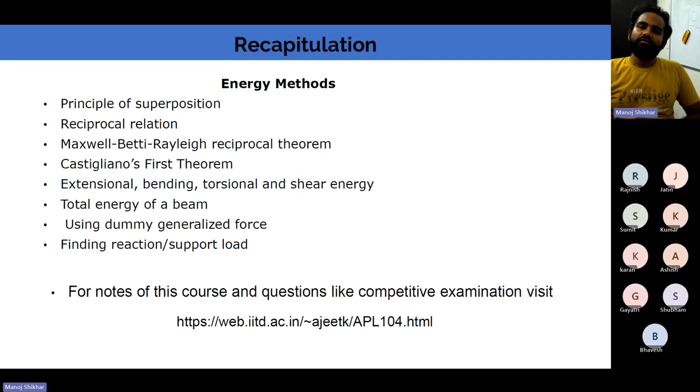Also, these notes have some questions at their end, and those questions are at the level of competitive examinations. So if you try to solve them, you may be able to get good marks in the Solid Mechanics portion of the competitive examination. Thank you.

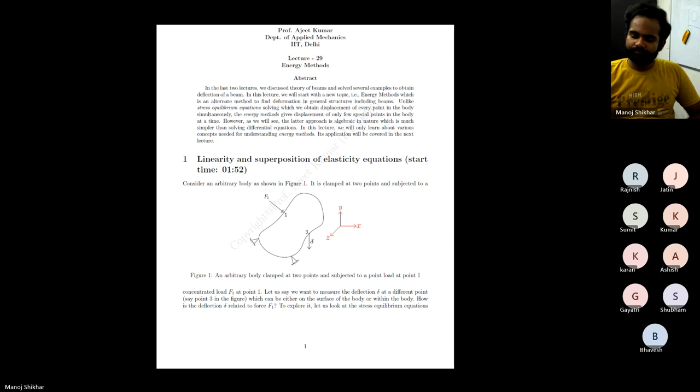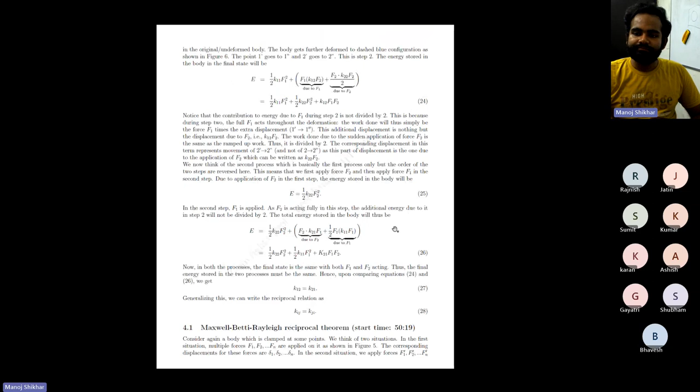But if you read advanced solid mechanics, continuum mechanics, or advanced finite element methods, there we do not use the superposition method. So in superposition method, what we do is find displacement due to each of the forces and add them. Sir has discussed this in a very extensive manner in his video lecture, so I will skip this part. There are a few things which you should remember.

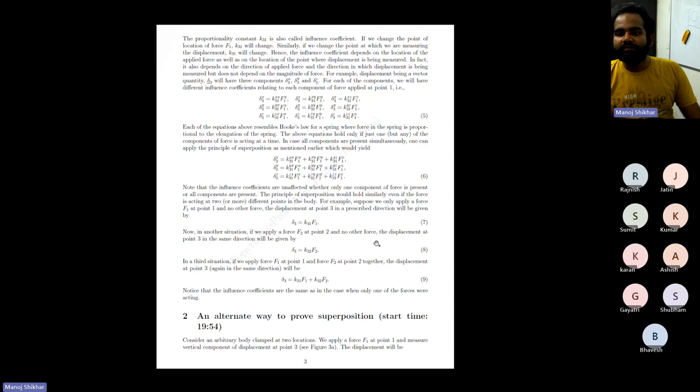There was one interesting thing sir had discussed here, maybe I can reiterate that. In this case, first we applied a force F1, so we wrote the displacement delta 3 that happens solely because of F1, which was K31 times F1. Then we applied F2, so delta 3 now will have the displacement due to F1 plus the displacement happening because of F2. Then we applied minus F1, so the net force on the body became F2. So we know that the deflection due to F2 will be delta 3 equal to K32 times F2.

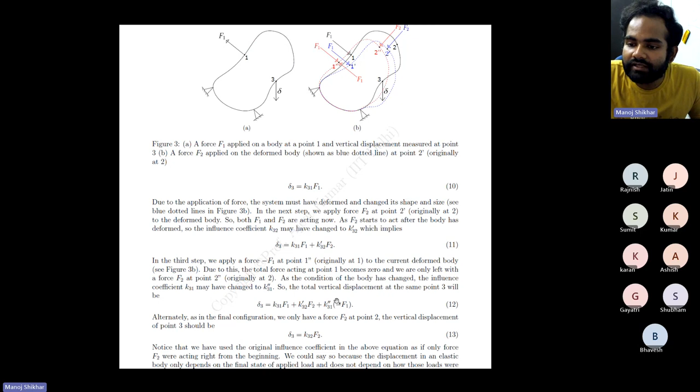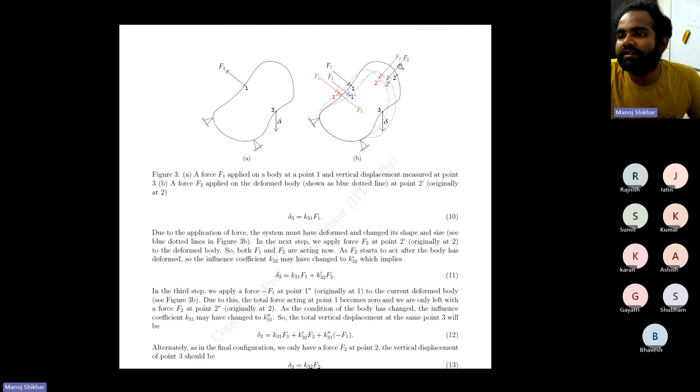From equations 11 and 12, the difference will be that in delta 3, there will be one more extra term, K31 double prime minus F1. So equation 12 and 13 should be equal because we are applying only F2 on the body. Equating this gives equation 14. Since this is true for any F1 and F2, the coefficients of F1 and F2 should be 0. From there we get K32 prime equal to K32, and K31 equal to K31 double prime. So this is the superposition method, the alternate way to prove it.

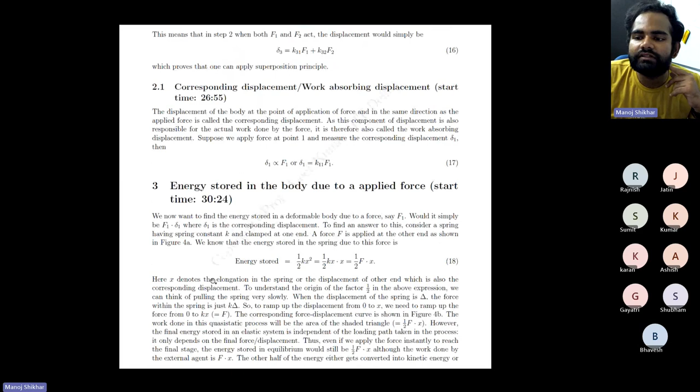Another interesting thing was that we wrote energy stored equal to half kx square. So if we apply a force slowly, like from 0 to F, then the total work done will be half into F into X, which is the area of this triangle.

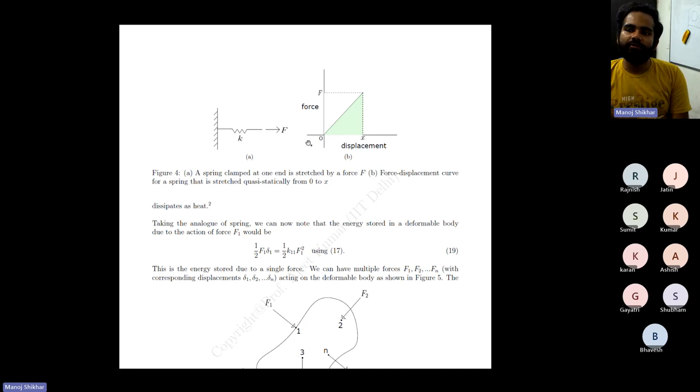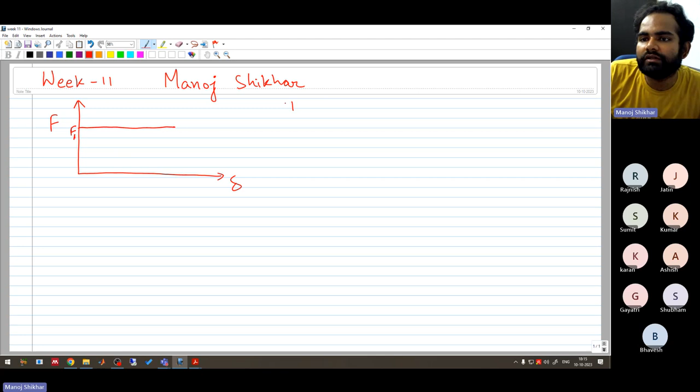But if you suddenly apply the force, the force versus displacement graph will look something like this. We are applying a force F1 from the start. So in this case, total work done by force F will equal the area under this curve. Suppose this point is X and this is 0. Then work done equals F dot X, so we can say Fx. The energy stored in the body will still be half Fx, not half Fx square — sorry, half into Fx.

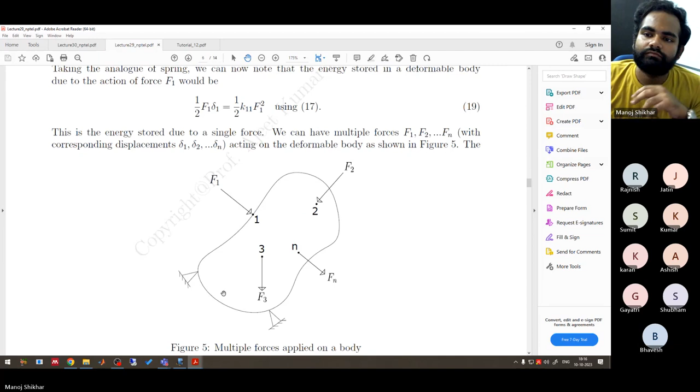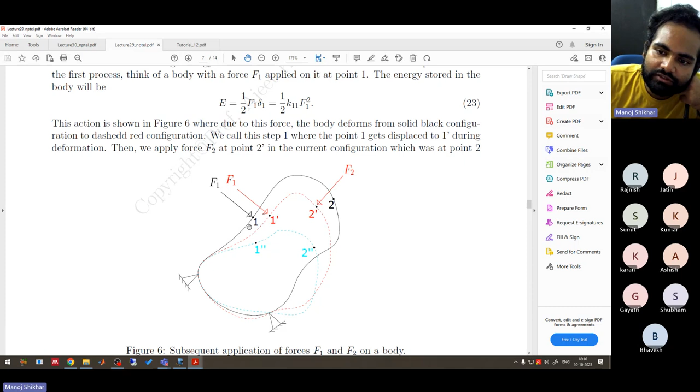One more interesting thing — and I want to discuss this because I've seen many students making this mistake. Initially we are applying only force F1 on this body, so the body gets deformed. The energy stored in the body will be half into F1 delta 1. As discussed, the energy stored will be half into F into displacement, so we can write half K11 F1 square, replacing delta 1 by K11 into F1.

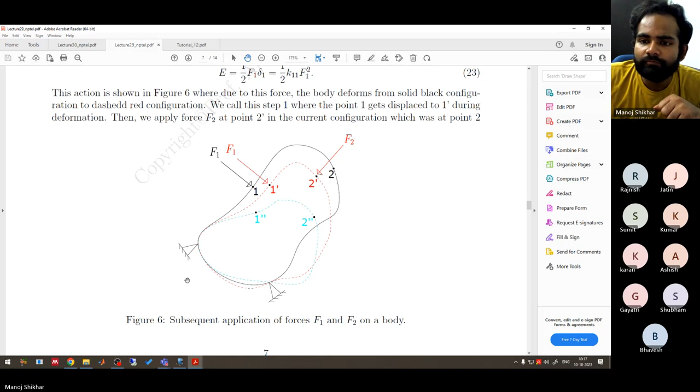Now we are applying F2, and because of F2, there will be some displacement at 1. So while writing the energy after applying F2, the energy stored in the body because of deformation at 1 will be F1 into delta 1. This delta 1 is like the new deformation, from 1 prime to 1 double prime. Since F1 is already acting from the start of this new application, the total work done by the force will be F into X, and that is what gets stored in the body. That's why it's F1 into K12 F2, and the energy stored due to F2 alone will be half K22 F2 square. So keep this in mind.

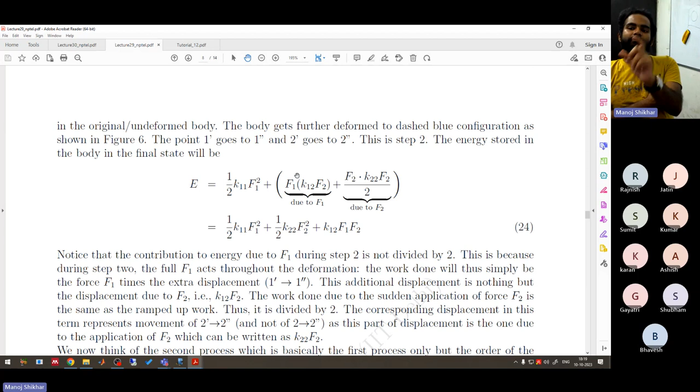What people often do is write energy equal to half F1 delta 1, then after applying F2 they write half into F2 into delta 2, forgetting this extra term. You should not forget this term, and also remember that the half factor will not be there for this case, because F1 is already acting upon the body when you apply F2. So F1 is acting throughout the new displacement happening from 1 prime to 1 double prime.

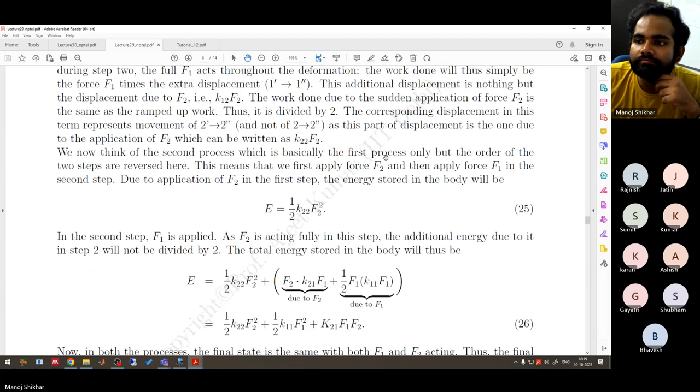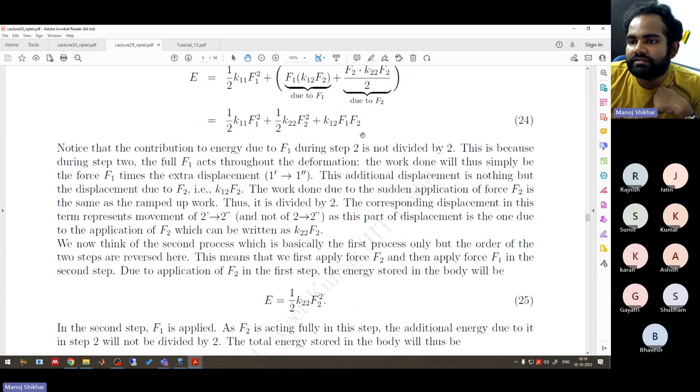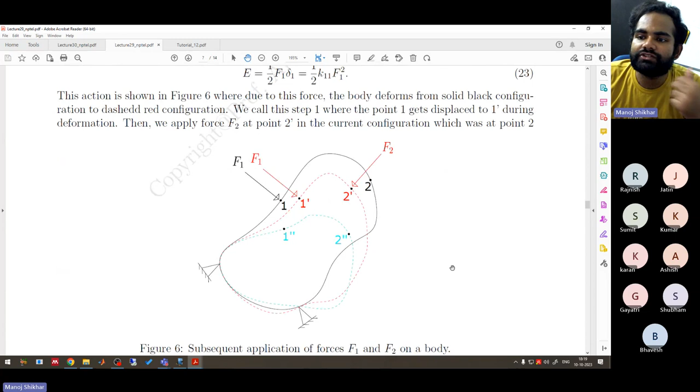Then we did the analysis by first applying F2 and then applying F1. From there we have equation number 24 and equation number 26. Comparing them, we find that the last terms, K12 F1 F2 and K21 F1 F2, are different. But since we are using a linear elastic body, the final energy stored should be equal. Hence K12 must equal K21, and thus Kij equals Kji. This is called the reciprocal relation.

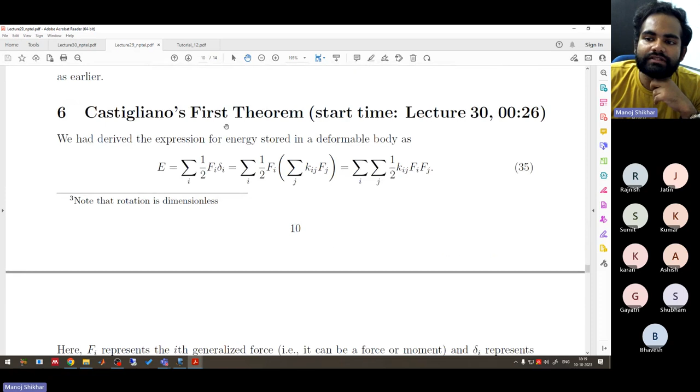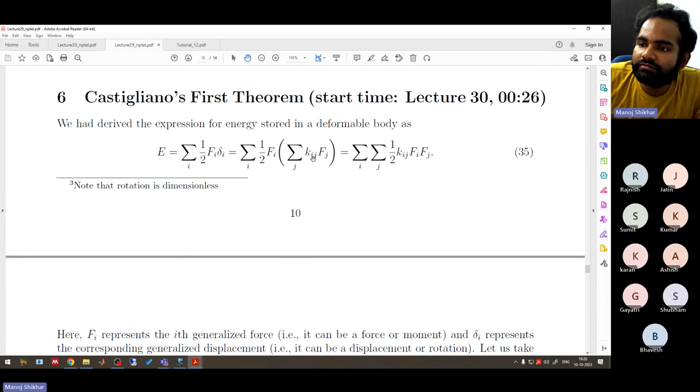Now, Castigliano's first theorem states that if we know the energy stored in the body, we can find the generalized displacement at the ith node by differentiating it with respect to F at that node. So E equals half fi delta i. We can replace delta i by this term and get an expression like this.

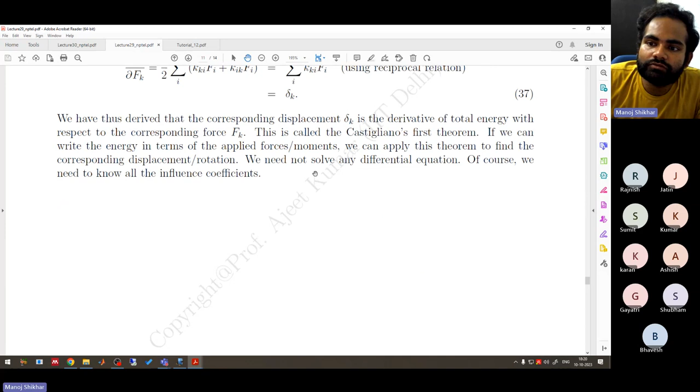So this is what Castigliano's first theorem is, that the corresponding displacement delta K is the derivative of total energy with respect to the corresponding force Fk.

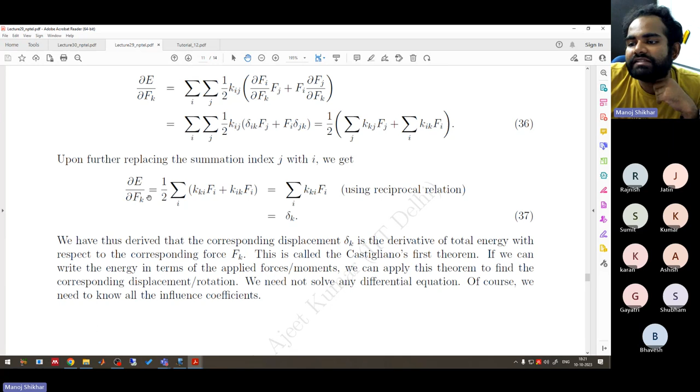Suppose if I tell you to find the corresponding rotation theta K with respect to the corresponding moment Mk. So what we will do is differentiate this E with respect to Mk. Mk is the moment, so that is what we will have to do.

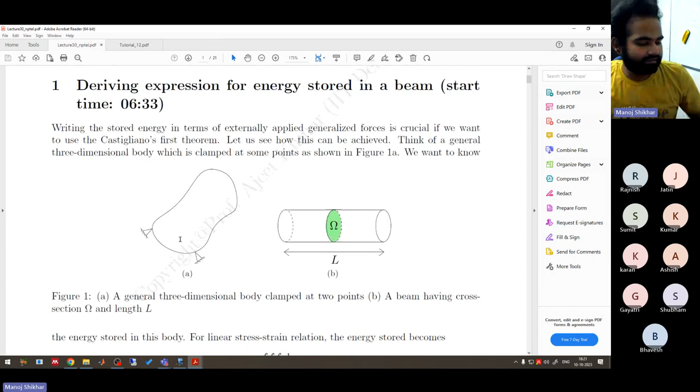Then in the next lecture, so in the last lecture, we were introduced to the idea that we can find the displacement or the generalized displacement delta K by differentiating our energy with respect to Fk.

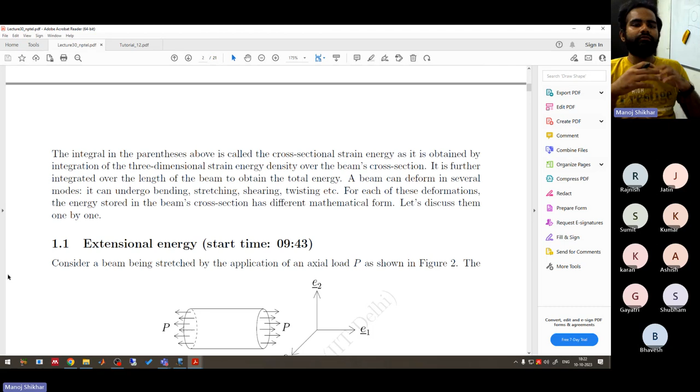So how to write total energy, that is being discussed in lecture 30. How do we write the total energy E? While writing the total energy, we have to take into account all kinds of forces and moments acting on the body, or in other words, all kinds of energies like extensional energy, bending energy, torsional energy, and shear energy due to transverse load.

We know it doesn't matter if it is a linear or non-linear case, energy is always additive, so we can always add the energies, right? So this total energy finding method is not necessarily only true for linear elastic bodies, but the superposition theorem is only applicable for linear elasticity basically.

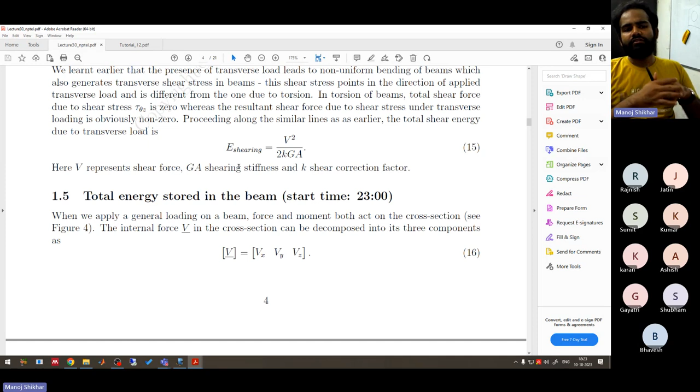Writing the energy depends on the material model, you may have different G or different J, different material properties like G, E. Depending upon that, these may vary. J will depend upon the geometry of the body. So depending upon these factors, the energy expressions will be different.

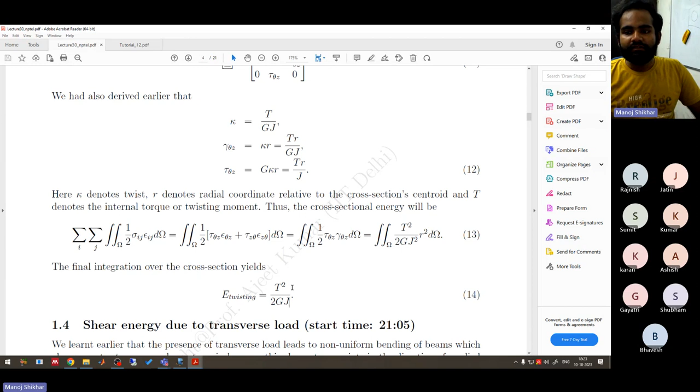It may be different, but in the end we can find the total energy by adding all the energies. We can calculate bending energy, extensional energy, shear energy, torsional energy, and add all of them to get the total energy of the body.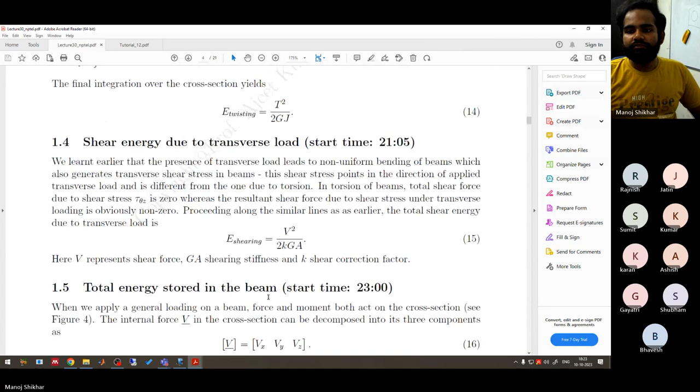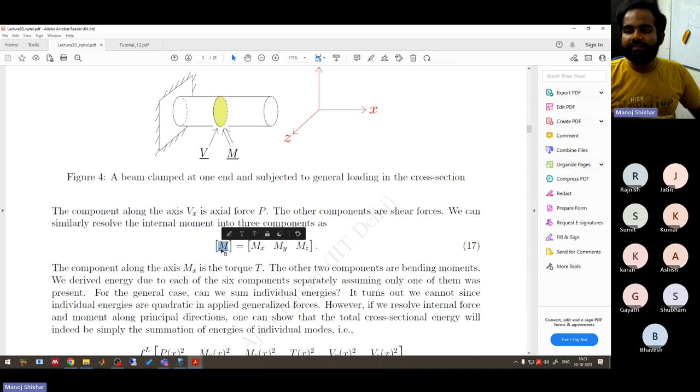So in this case, mainly the energy due to the shear force V and moment M is written because we are writing the energy for a beam. Okay, so now we can move on to some of the problem statements.

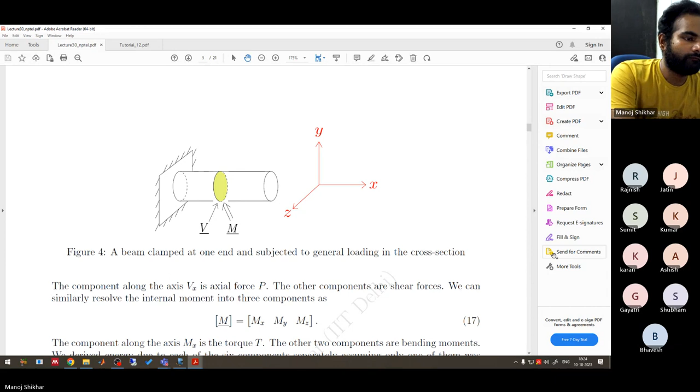So the question is, think of a rectangular beam as shown. Assume its cross-section to be solid circular. Suppose that ring is subjected to equal and opposite forces at A and B. And neglect the energy in the beam's cross-section due to shear force and axial force.

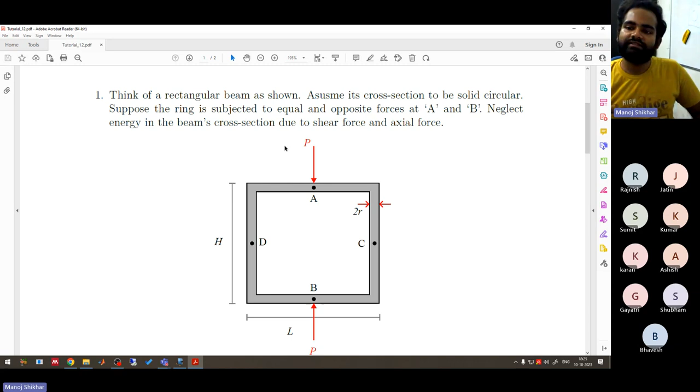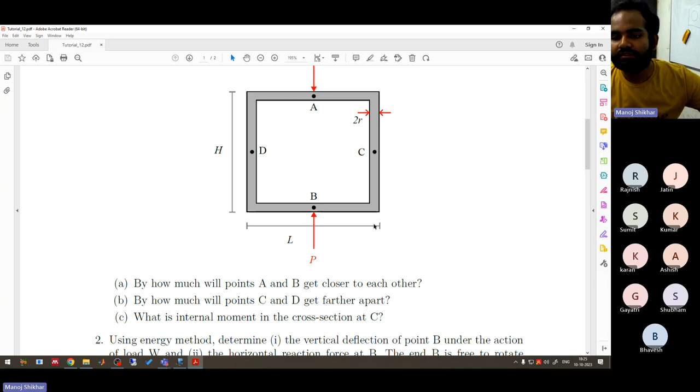The questions asked are: by how much will point A and B get closer? They are applying forces P at A and B, and asking how much A and B will get closer. Second, by how much will points C and D get apart? And third, what is the internal moment in the cross section at C? So we have to find what M will be here.

I think it's clear. So from tutorial 12, we will be doing question number 1 right now.

So here they have given us a rectangular ring. They've applied loads at two points, this point is A, this point is B. There are 2 points C and D here. This is the length L by 2 and L by 2.

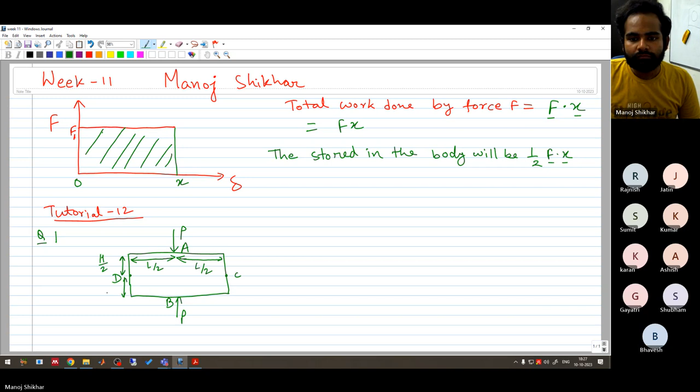And they are asking, the first question is delta AB, so what is the distance between... B/W means between, okay, I'm using a short form so I'm just declaring it. The second question is we have to find delta CD.

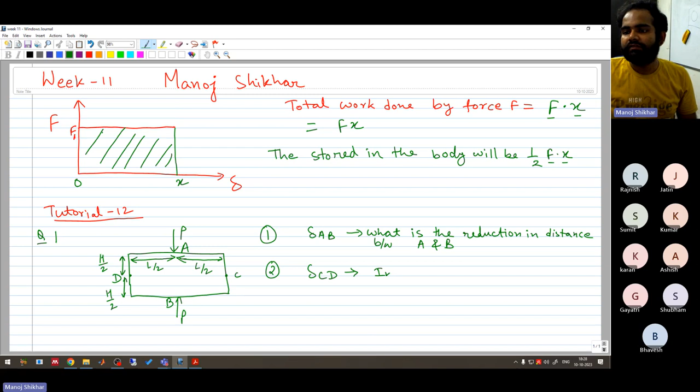Like reduction in distance, increase in distance between C and D. And the third question is moment at cross section at C. So this is what we have.

So looking at this question, first thing we should observe is that this is a symmetric problem, so we can actually look at the top part first. This is our A. So we are taking a section at C and D, which are the midpoints of these limbs. So here the forces and moments will be...

Before doing that, we can also observe what the deformation will be in this case. So our body will deform, and our body will have some final shape like this.

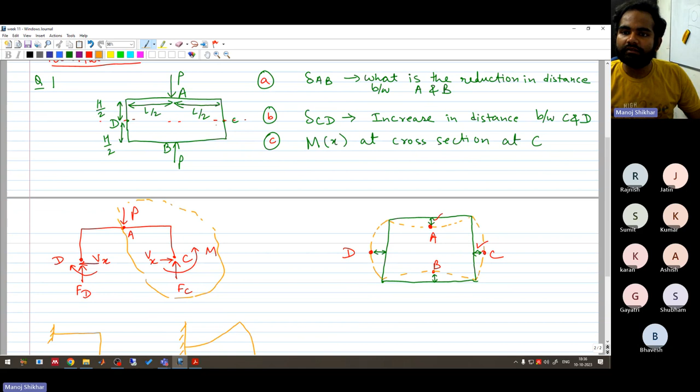Now let us consider what will happen if we had cut at point C, because that will give us the value of VC.

So if you look at it, this is the upper half and this is the lower half. This is point A, this is point B. B will also be treated like A only, because B and A are essentially going through this similar kind of deformation. B is also not rotating, it can only move downwards.

So if we fix B, our final system will be something like this. So from here, if we take a cut section at this point C, our Vx will be in this direction. Suppose we are assuming Vx to be in this direction, or let me write it as VC in this direction for A, then for B it will be in the other direction because of Newton's third law.

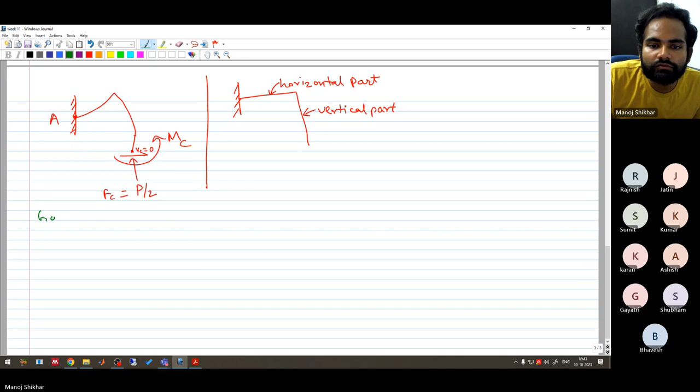Now our goal will be what? New goal is to find moment Mx in the horizontal and vertical part. So let's first do the analysis for the vertical part.

Suppose we have made a cut somewhere at this x. So this is our case, right? This is h by 2 and this is L by 2. So remember that. For the vertical part, this is our x - suppose we have made a cut at this x.

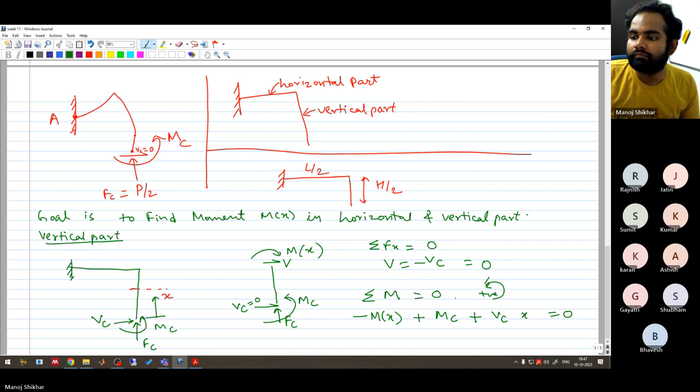Summation of M equal to 0, and I'm assuming counterclockwise as positive. So minus Mx plus Mc plus Vc into x equal to 0. So Mx is Mc plus Vcx. So this is the vertical part.

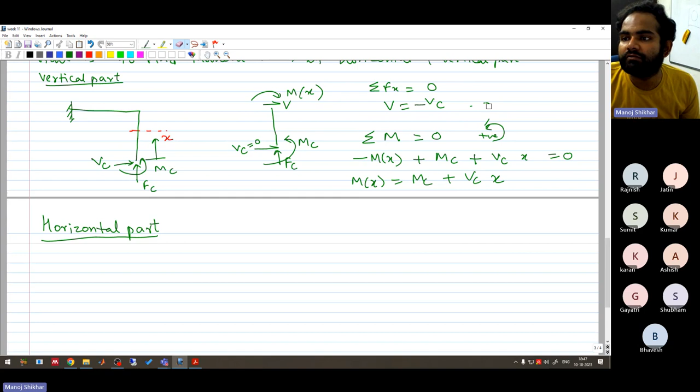For horizontal part, let's keep it as V equal to minus Vc right now. For the horizontal part, what will happen? We have something like this. Our X will be somewhere here, and we are making a cut here. So our final FBD will be - since this has the negative normal direction, our moment will be in clockwise direction, and our shear force will be in the negative direction.

Here actually I have made one mistake. The direction of shear should be in the opposite direction because this is the negative normal face. Here V equal to Vc. And there is some other force here. Here we have Fc, we have our moment Mc, and Vc equal to 0.

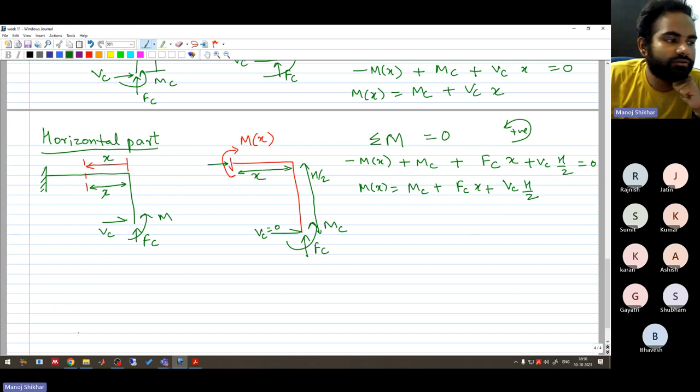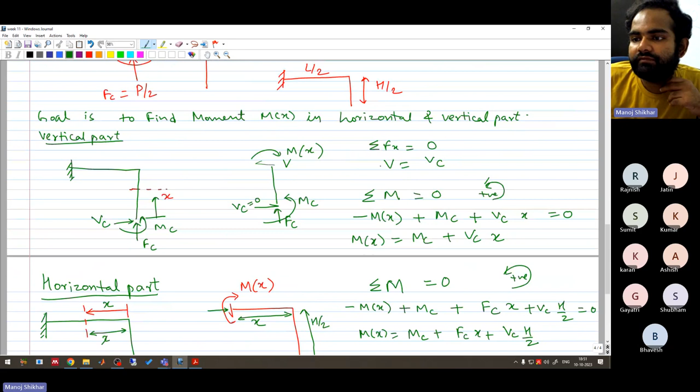So we have found the moment in the vertical part and top part. Now we need to write the total energy due to bending. Also, one thing mentioned in the question is that we have to neglect the energy due to shear force and axial force. That's why we will not consider the energy due to this V or any axial force - we will just write the energy here with respect to bending only. So this is given in the question, that's why we are doing it. So the total energy will be only due to the bending moment.

But this bending moment itself is a function of Mc, Fc, and Vc, right? So we are showing here in the arguments Fc, Vc, and Mc. Now the interesting part comes because we have two different kinds of moments in the horizontal and vertical limbs, so we will have two integrals here. First we will write for the vertical part - so here the moment due to the vertical part will come. What was it? It was Mc plus Vc into x, right? So the energy due to bending is M square by 2EI - that is what I'm replacing here.

For the horizontal part, we are moving from 0 to L by 2. The bending moment of the horizontal part is calculated as MC plus FCX plus VCH by 2, whole square, by 2EI, dx. Now this is the total energy.

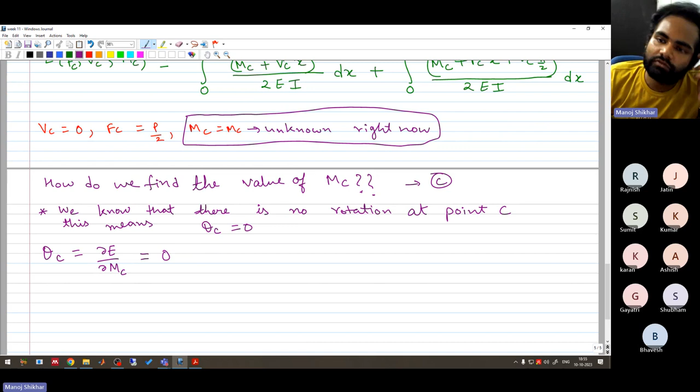So we have the energy expression here. We know that if we differentiate it with respect to MC, we will get theta C, and we know that it will be 0. So we have to differentiate this energy equation and equate it to 0, where FC is P by 2 and VC is 0. So let's do that.

So del E by del MC will be what? The integral 0 to h by 2. The upper part will be differentiated with respect to MC, so it will come to be 2 times MC plus VCX into 1. So this will be by EI, 2EI.

Plus 0 to L by 2, 2 times MC plus FCX plus VCH by 2, by 2EI, and this should be equal to 0. So we know that VC equal to 0, and FC equal to P by 2. So we'll put it here and we will get.

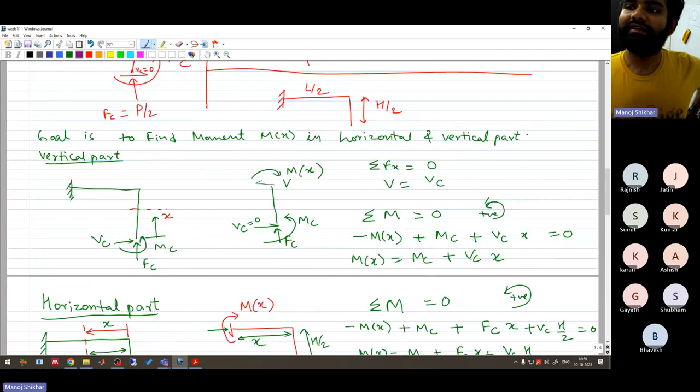Now we have to find the reduction in the distance between A and B. We have to find what is the reduction in distance between A and B, and to do that, how do we do that? To find the reduction in distance between A and B.

We will have to do del E upon del FC, at VC equal to 0, FC equal to P by 2, and MC equal to what we have found here, minus PL square upon 8 into H plus L. So this is what we will have to do.

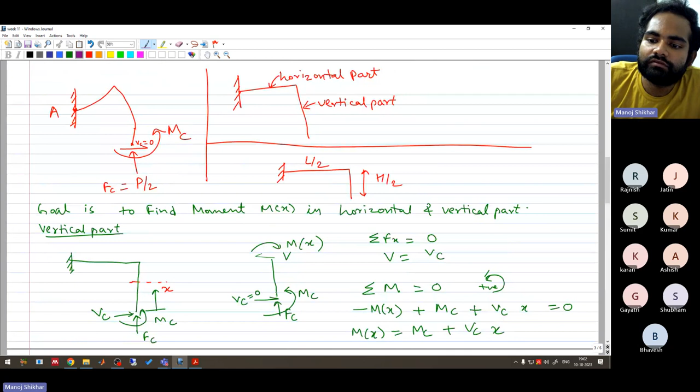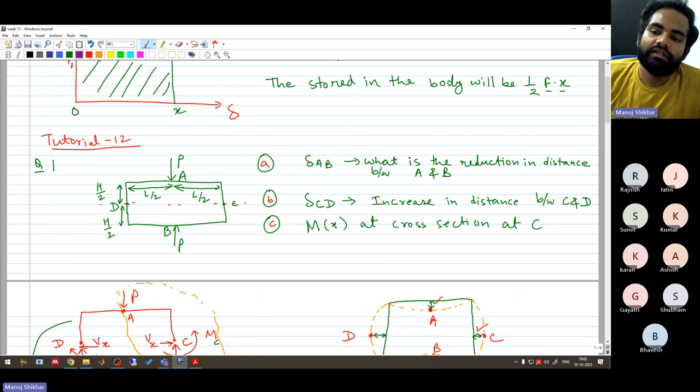And why are we able to write it as del E by FC? The amount point C will move in the vertical direction, that is the deflection of this point A. That's why we are able to do that.

So anyways, moving forward, this will cancel. We can take 1 by EI outside, and we can also do VC equal to 0. So we have essentially 0 to L by 2, MCX plus FCX square dx. So delta AB by 2 is 1 upon EI into MCX square upon 2 plus FCX cube upon 3, 0 to L by 2.

So this is 1 by 4 EI, L square, 1 by 4 EI, MC plus FL by... this is what you will get finally. So delta AB will be 2 times L square upon 4 EI into MC upon 2 plus FL upon 6. So this is L square upon 4 EI into MC plus FL by 3.

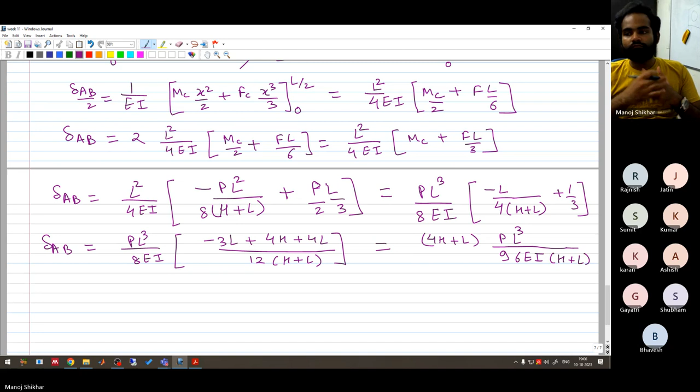So this is the final solution. So this is delta AB.

Now to find the increase in distance between C and D, we have to do delta CD by 2 equal to del E upon del VC at C. So here VC equal to 0, FC equal to P by 2, and MC equal to minus PL square upon 8H plus L.

So again, we will, let me copy this. Save this also. So this is the total energy, right? So we will have to differentiate this total energy with respect to VC.

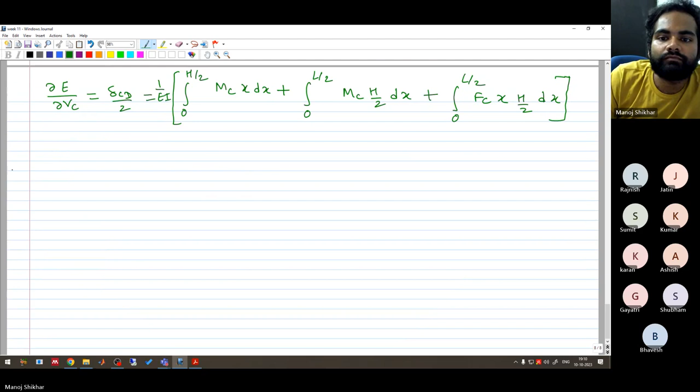So delta CD upon 2 is MC x square upon 2, 0 to h by 2, plus MC h by 2 into x from 0 to L by 2, plus FC h by 2 into x square upon 2 from 0 to L by 2. So this 2 will cancel. So we have delta CD equal to MC h square upon 4 plus MC HL upon 2 plus FC HL square upon 8.

Okay, so here substitute the values of MC, PL square upon 8H plus L. I have missed 1 by EI. So remember to include 1 by EI, which we had taken common, minus PL upon...

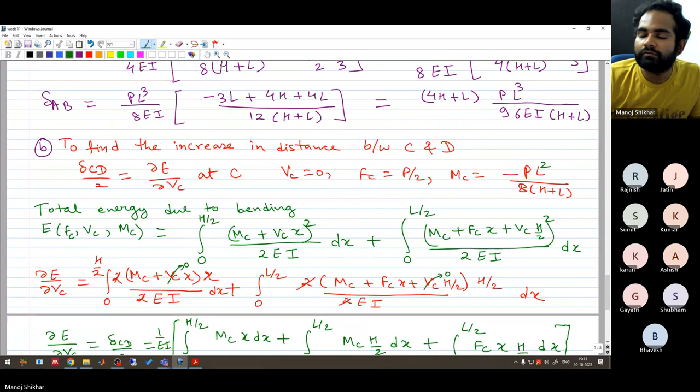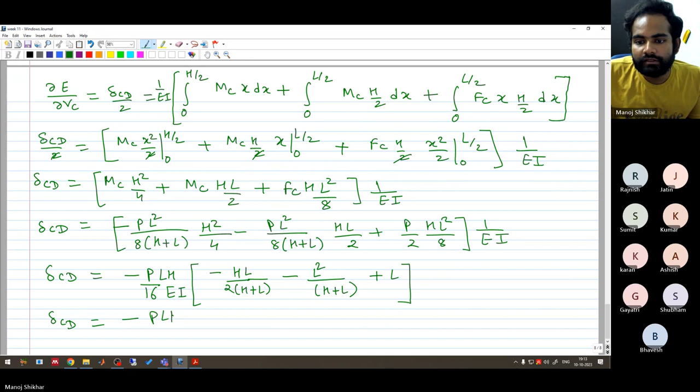So solve this and we will get PLH upon 16 EI into minus HL plus minus 2L square plus L into H plus L on 2 into H plus L. So delta CD is minus PLH upon 16, 32, EI into H plus L. From here we will have minus 2L square minus HL plus HL plus L square. This will cancel.

So this minus, and from here I will have minus L square. So PL cube H upon 32 EI into H plus L. This is delta CD.

So this is the method to do it. If I have done some calculation mistake, you can recheck it, but this is the way to do it. You have to find the differentiation of E with respect to VC, and after that you have to calculate the different values. So hopefully I've not done some calculation mistake here.

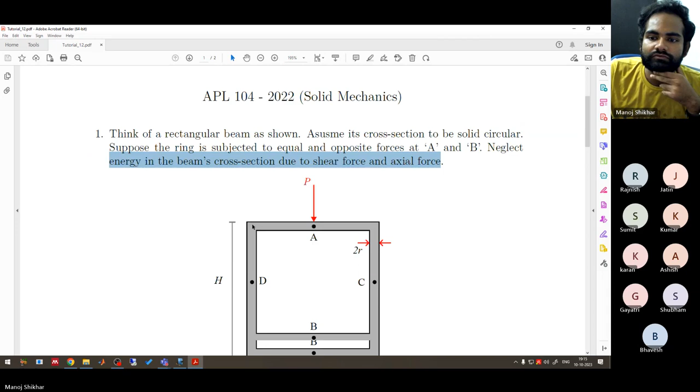Anyways, let's move on to question number 2. So question number 2 is using the energy method, determine the vertical deflection of point B under the action of load W. So this is point B and the horizontal reaction force at B. What will be the horizontal reaction force at B?

The end at B is free to rotate, so rotation is free, but it can move only in the vertical direction. The body is allowed to move in the vertical direction. Consider all forms of energy, that is bending, twisting, stretching, as well as shearing energy.

First, look at this question. At B, there will be only horizontal reaction. Why? Because first of all, it is allowed to move in the vertical direction, so there will not be any reaction there, and it is free to rotate at point B. So only horizontal reaction will appear at B.

So let's move on to question number 2. Hopefully I will be able to finish this one. And they have given some dimensions also, right? So they've given the radius of this circular arc to be A.

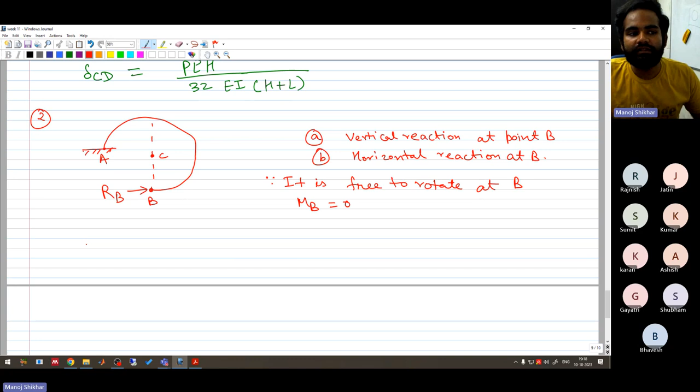And to find the vertical deflection, also the vertical force has been mentioned to be W here. They have given that there is some W here. So what are the knowns? Knowns are W,

the dummy load, we will apply a dummy moment load, MB, to find the rotation. These are known. And unknown is what? Unknown is RB, the horizontal reaction at B. This is unknown.

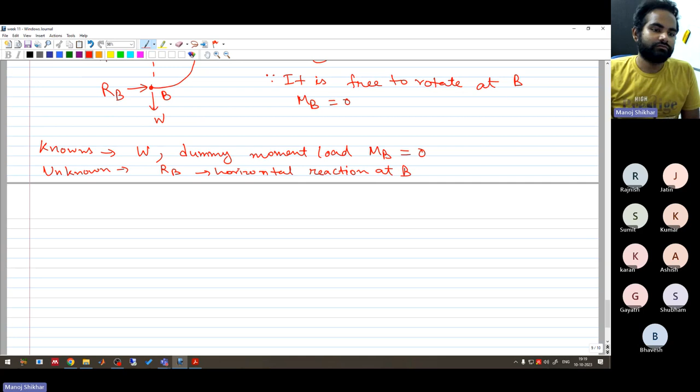And they have told us to use all forms of energy. So we need to write the bending energy, the shear energy, the torsional energy, and the extensional energy, right?

So what will be the steps? We need to find the moment, this is M theta. We need to find the shear force, that is V theta. And we need to find the axial force also. Why? Because we will have to write all forms of energy. So we need axial force for stretching, shear force for shear energy, and moment for the bending energy. So we need to find them.

So how do we do that? We will make a cut from here at some angle theta. Here we have W, we have RB. Suppose the moment is in this direction, MB equal to 0. So this makes it our positive face, right?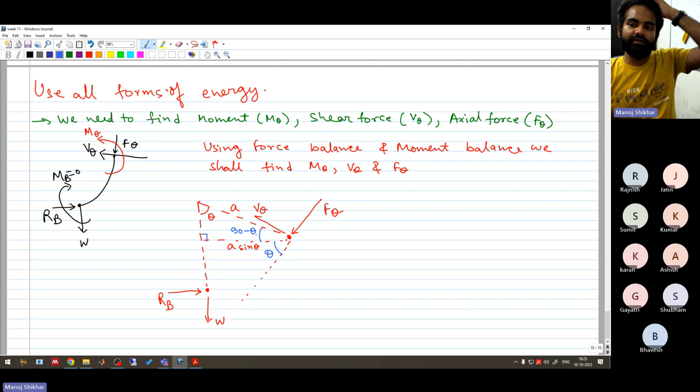This is A and this is theta. This is A sine theta. This angle will be theta, this angle will also be theta. Why is this angle theta? Because this is theta, so this is 90 minus theta. This is 90 degrees, and here it is in the axial direction. So this whole angle is 90 degrees, so this is 90 minus theta, so this must be theta, right?

So let's do summation of F. Let's decompose the forces. Suppose this is Y and this is X, or E1 or E2, I will say. Suppose this is E1 and this is E2. So F theta cos theta E1 plus F theta sin theta E2.

So if you do the force balance and moment balance, because time is running out, I will directly write it. You will get F theta equal to RB cos theta minus W sin theta. You will get V theta equal to RB sin theta plus W cos theta. And okay, I forgot to mention moment here, so I should write it.

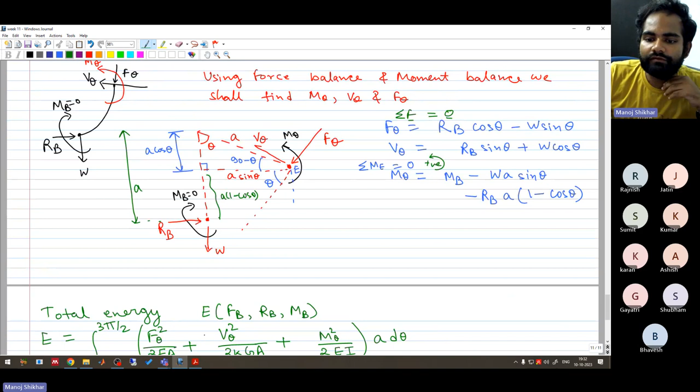Now, if we move to the question, we can see that the end B is free to rotate. It can move freely, it can move only in vertical direction. This means that the end B cannot move in X direction.

So this means del E upon del RB equal to delta of B in horizontal direction, I will say it as delta Bx. That is delta Bx equal to 0. So if we do that, we will be able to find the value of RB.

And we know MB equal to 0. So after doing this, we will have to put MB equal to 0. Let's differentiate. So 0 equal to integral from 0 to 3 pi by 2.

2 times RB cos theta minus W sin theta upon 2EA, into cos theta, plus 2 into RB sin theta plus W cos theta upon 2kGA, sin theta.

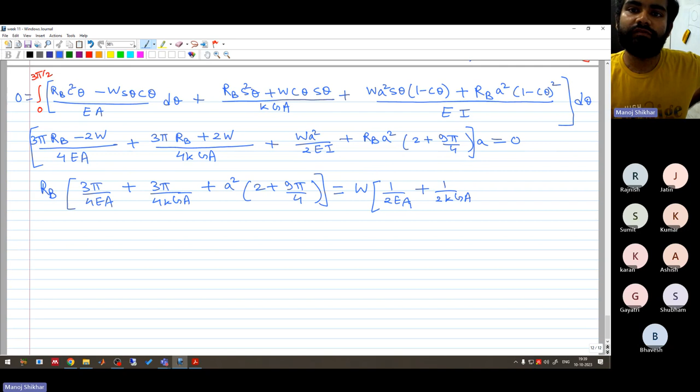This will be equal to 1 by 2EA plus 1 by 2kGA. Sorry, it should be with minus sign here, minus A square upon EI. So from here, we will get RB.

Now we have already found what is RB. Now what we have to do, we have to find the vertical displacement.

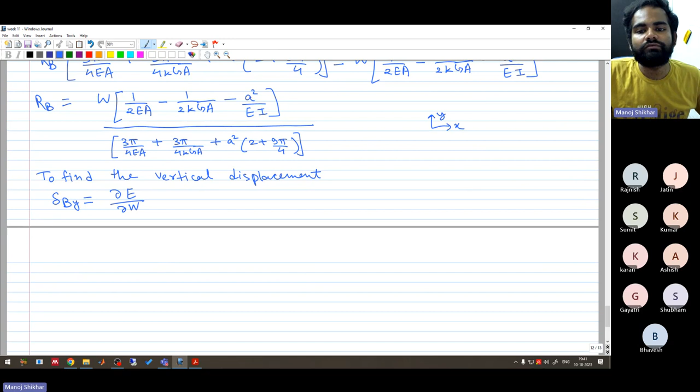To find the vertical displacement, we will do delta By. This is X, this is Y. So the vertical displacement delta By will be equal to del E upon del W. So we have to differentiate our energy with respect to W now.

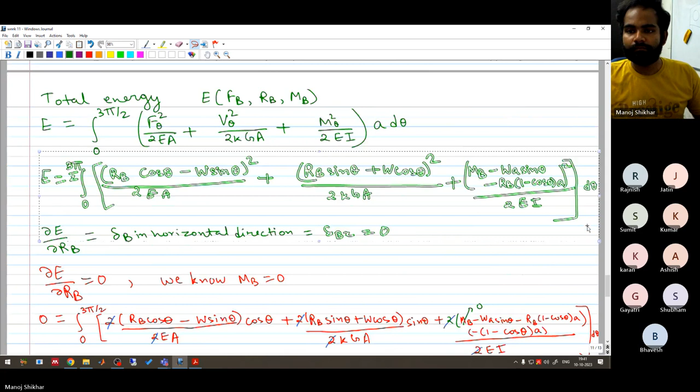If we differentiate with respect to W, what do we get? We get delta By equal to del E upon del W equal to the integral from 0 to 3 pi by 2 of RB cos theta minus W sin theta, into sin theta upon EA, with the negative sign.

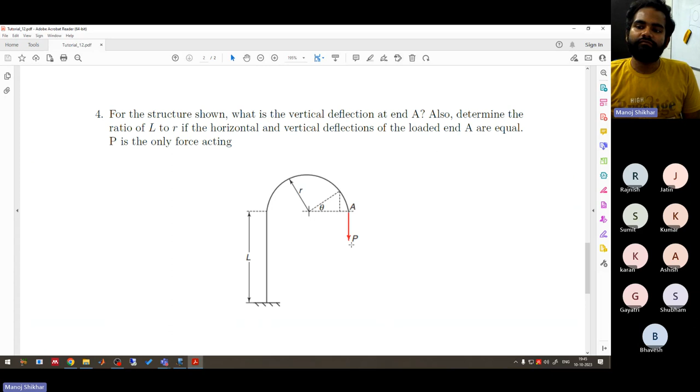So we have to first find the expression of vertical deflection at A. Then, in the vertical direction whatever deflection is happening, they are telling us the horizontal and vertical deflections are equal. So what will be the value of L by R? Okay, so this is question number 4.

Question number 3 has already been done in the class, so it will be better if I do the question which is not covered. So the P is applied here. This is a semicircle, I guess. Yes, the semicircle, this is point A, this is length L, and this is radius R.

So till now what we have done, if you remember, we first write the energy of the system, total energy. So what will be the steps?

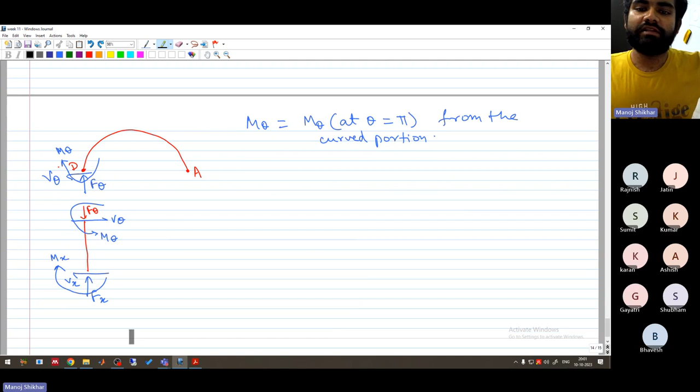curved portion. So I'd like to reiterate what I have done till now. Basically, we have to find the moment in this curved portion, and we have to find the moment in this vertical section, right? So I have made different cuts here. For the curved section, this analysis was done, whatever I have shown here. For the vertical section, we are doing this analysis, making cuts at D and some other point here at C.

Now at D, we know the value of moment. It will be the moment expression we have already found here, M theta. So we will have to put theta equal to pi here, and we will find the moment equation at D, M theta at D.

Let's write this as M theta at D. M theta at D equals P into (1 minus cos pi) into R minus FR sin pi. Since sin pi is 0, M theta at D becomes P into (1 minus (-1)) into R, which is 2PR.

And what will be V at theta? From here we have to also find V theta. The expression for V theta and F theta can be found by doing summation of F equal to 0. So what in the horizontal direction will the forces be?

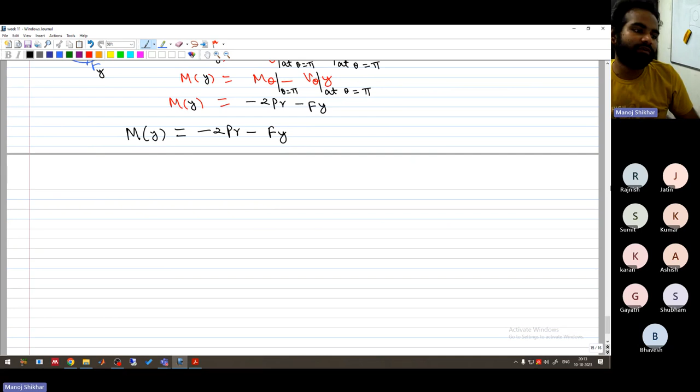This is the expression for My. I'm sorry, I'm exceeding today because I made a calculation mistake. I'm so sorry for that.

But now what we have to do is write the total energy. So total energy is integral from 0 to pi of M theta square upon 2EI into R d theta, plus integral from 0 to L of My square upon 2EI into dy.

So what are the steps? We have to consider the circular part or the arc part first. Then we will have to consider the vertical part.

And for the arc, we have to find the expression of m theta and v theta. Then we will find the values of m theta and v theta at point D, where theta equal to pi. So that is what has been done here.

After that, for the vertical part, we will cut a section at C, and we will also detach this vertical part from point D. So we will have our reaction forces like this, and we will calculate the moment at C. This is the moment we have calculated, and we have found it to be minus 2pr minus Fy.

Now the total energy we have written like this. We will replace the expressions of m theta. So the expression of m theta is minus pr into 1 minus cos theta plus fr sin theta, whole square upon 2EI, and this is integrated over theta, and there will be one more r, so here it will be r d theta, plus the expression for my is minus 2pr minus Fy into dy, and here it will be 2EI.

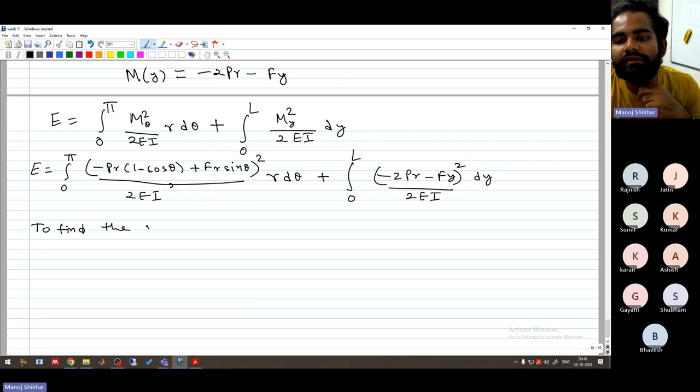Now to find the vertical displacement, do del E upon del P. Del E upon del P at f equal to 0. This will give you delta Py.

So do that, and you will find that delta Py equal to PR square upon EI into 3 pi r upon 2 plus 4L. So this is your delta Py.

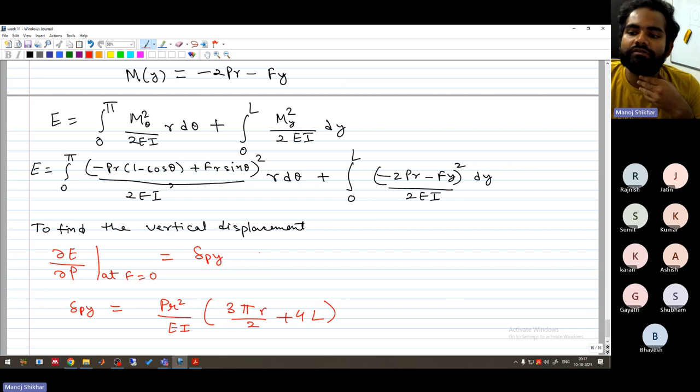Next step is, so this is if you differentiate E with respect to P and put F equal to 0, you will get delta Py after integrating.

And to find horizontal displacement, do del E upon del F at F equal to 0. Okay, so this will give you delta Px.

So similarly, follow the steps we have followed for other problems, and you will get delta Px equal to PR upon EI into minus 2r square plus 2L square. So this is part A done, part A of the question.

And from part B, now equate delta Px and delta Py. So if you equate them, delta Px equal to delta Py implies that PR upon EI into 2L square minus 2r square equal to PR square upon EI into 3 pi r upon 2 plus 4L. Okay, so P will cancel, EI will cancel, but R will go away.